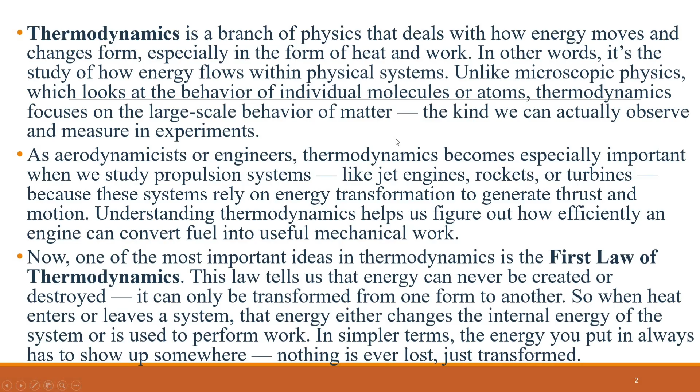Work. Let's pause for a moment and talk about what we really mean by work. In everyday life, we think of work as any physical effort, like lifting a box, pedaling a bike, or even running. But in science, we define work much more precisely. Work is the product of a force acting over a distance.

Imagine an aircraft that starts moving at time zero under the thrust force produced by its engines. As the engines continue to apply a constant force F, the aircraft accelerates and moves forward through a distance s. The total work done on the aircraft during this time is given by the formula: work equals force multiplied by distance. Here, the force is the thrust from the engines, and the distance is how far the aircraft travels from the starting moment, time equals 0, to some later time.

The standard unit of work in the metric system is the joule, which equals 1 Newton of force acting through 1 meter of distance. In the English system, the equivalent unit is the foot-pound.

Now, that's a nice simple example, but real life is rarely that neat. In most real situations, the force acting on an object doesn't stay constant. It can change in size and even direction. For example, as an airplane climbs, turns, or descends, the forces acting on it are constantly shifting. When that happens, the total work done is calculated by integrating, or summing up, the components of the force that act in the same direction as the object's motion. Only that part of the force that's aligned with the motion actually performs work.

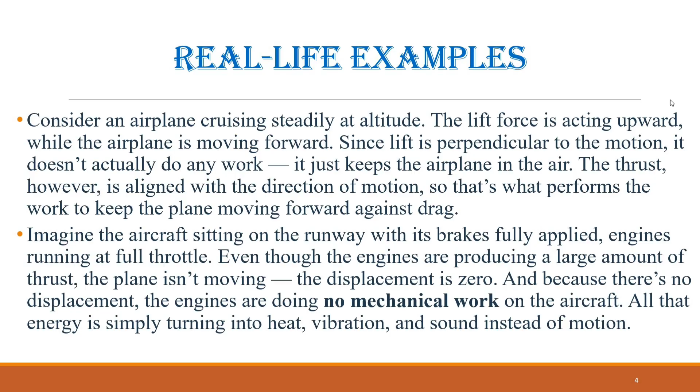Work done by a gas. So far, we've talked about work being done on solid objects. But in thermodynamics, we also deal with gases, and the concept of work looks a little different there.

For gases, work is done whenever the volume changes while under pressure. Think about it this way. Pressure represents a force per unit area, and volume changes when the boundaries of the gas move, like a piston sliding in a cylinder. If the gas expands, it pushes the piston outward, doing work on the surroundings. If it is compressed, work is done on the gas. This idea is not just theoretical, it's the principle behind engines and turbines all around us.

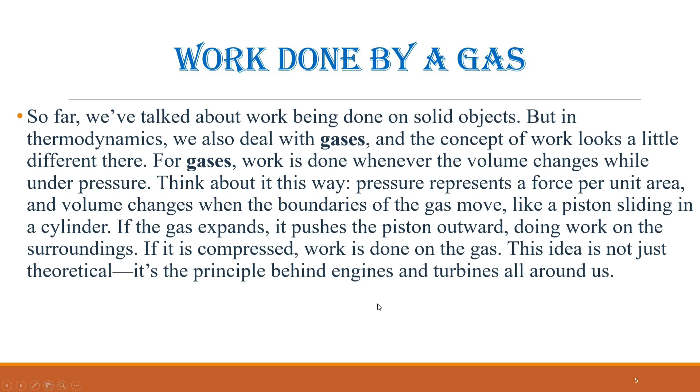The state of a gas is determined by measurable properties such as pressure, temperature, and the volume it occupies. These properties can change, resulting in a new state for the gas. For example, imagine a gas confined in a jar. In one state, the gas may have high pressure and occupy a small volume, which we call state 1. In another state, it may have lower pressure and a larger volume, known as state 2. We can represent these states visually on a graph of pressure versus volume.

To move the gas from state 1 to state 2, we can change the conditions in the jar by heating the gas, physically moving the piston to adjust the volume, or altering the pressure by adding or removing weights. Each method changes the state differently, and thermodynamics allows us to calculate how much work is done or how much heat is added or removed during these changes.

There are several ways to change the state of a gas, and the path taken matters. For instance, if we gradually remove weights from the piston, allowing the gas to expand and the pressure to decrease naturally according to Boyle's law, the path on the pressure-volume graph is curved. The work done by the gas in this process corresponds to the area under this curve.

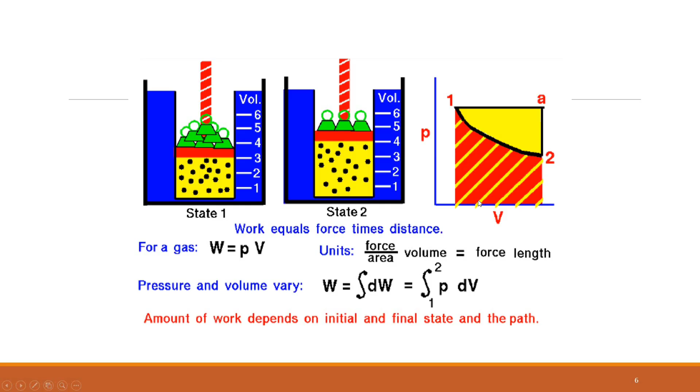We see these principles in action every day. Consider the cylinder of a car engine. When the air-fuel mixture burns, it produces hot gases that expand and push the piston downward. This expansion performs work which is transferred through the crankshaft to generate mechanical motion, ultimately moving the car. In a jet engine, high-pressure gases produced by combustion expand rapidly and rush out of the exhaust, doing work on turbine blades and producing the thrust that propels the aircraft forward.

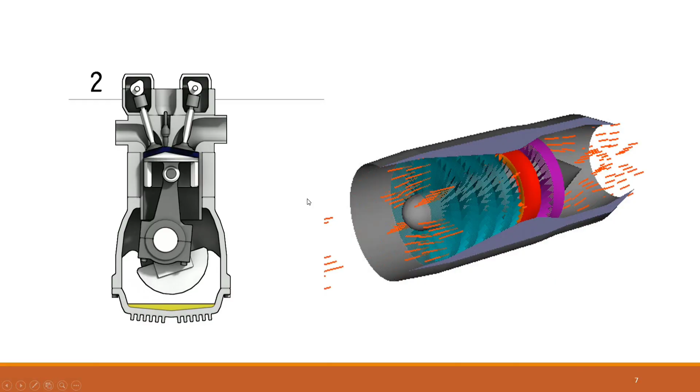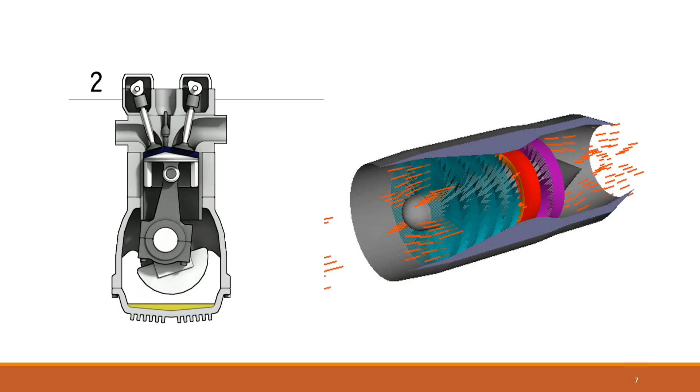Even something as simple as a refrigerator relies on thermodynamic work, as a gas is compressed and expanded in the cooling cycle to transfer heat away from the interior. As you can see, thermodynamics is not just an abstract or theoretical subject. It is the science that explains how energy powers the world around us, from the engine in your car, to the refrigerator in your kitchen, to the jet that carries you across the globe. Every time energy changes form, whether fuel turning into motion or heat being converted into work, thermodynamics is at play.

Enthalpy. As we know, the state of a gas is defined by several properties, including its temperature, pressure, and the volume it occupies. From our study of the first law of thermodynamics, we know that the internal energy of a gas is also a state variable. This means that internal energy depends only on the current state of the gas, not on the process that led the gas to that state.

In thermodynamics, we can also define additional state variables that are combinations of existing variables, and these often simplify the analysis of a system. One particularly useful variable for gases is enthalpy, denoted as H. Enthalpy is defined as the sum of the internal energy, E, plus the product of pressure P and volume V. Enthalpy is equal to the internal energy plus the product of pressure and volume.

Enthalpy can also be expressed as a specific or intensive variable by dividing it by the mass of the gas. In propulsion and engine analysis, engineers often work with specific enthalpy rather than total enthalpy because it is more convenient for calculations involving flow and energy per unit mass.

To understand the practical use of enthalpy, let's revisit the first law of thermodynamics for a gas. For a system experiencing heat transfer Q and doing work W, the change in internal energy is equal to the heat added to the system minus the work done by the system. The change in internal energy from state 1 to state 2 is equal to the heat added to the system minus the work done by the system.

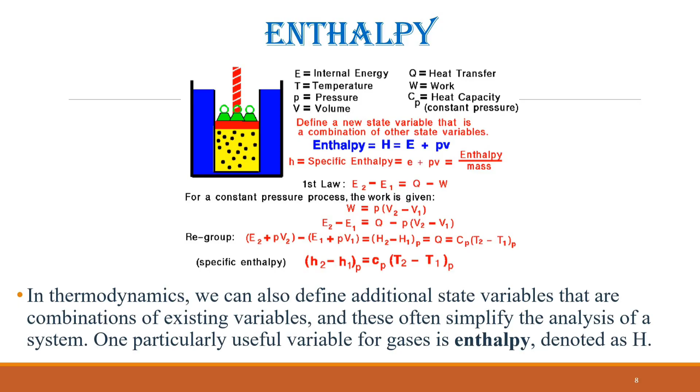Entropy of a gas. The first law of thermodynamics indicates that the total energy of a system is conserved. This includes the potential and kinetic energy, the work done by the system, and the transfer of heat through the system. The second law of thermodynamics states that, while many physical processes satisfy the first law, the only processes that naturally occur are those for which the entropy of the system either remains constant or increases.

Entropy, like temperature and pressure, can be explained on both a macro scale and a micro scale. Since thermodynamics deals primarily with the macro scale, here entropy is defined as the heat transfer into the system divided by the temperature.

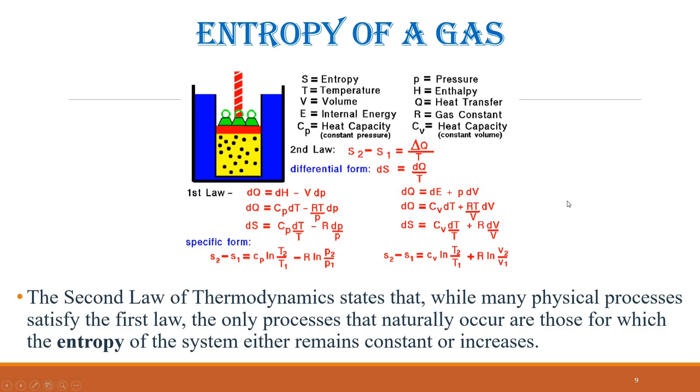Specific forms of equation 9 and equation 15 can be developed by dividing by the mass to obtain the specific heat capacities and specific volumes, which are commonly used in practical thermodynamics and propulsion analysis.

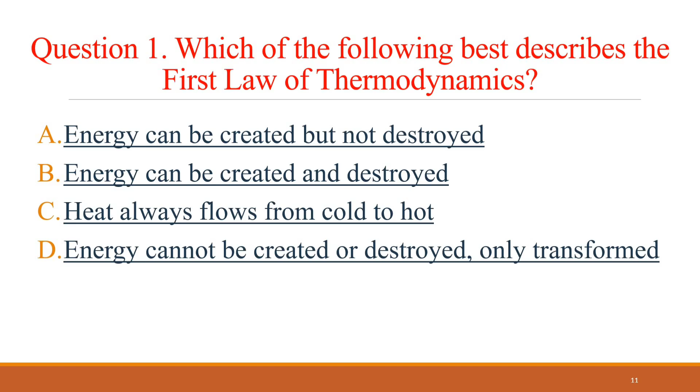Okay guys, now let's have a little quiz. The quiz consists of 5 questions. I'll give you 10 seconds for each one, and then I'll show you the correct answer. Let's start with the first question. Question 1. Which of the following best describes the first law of thermodynamics? The correct answer is energy cannot be created or destroyed, only transformed.

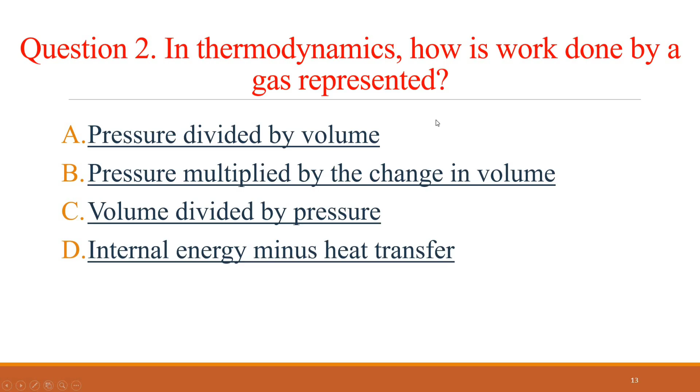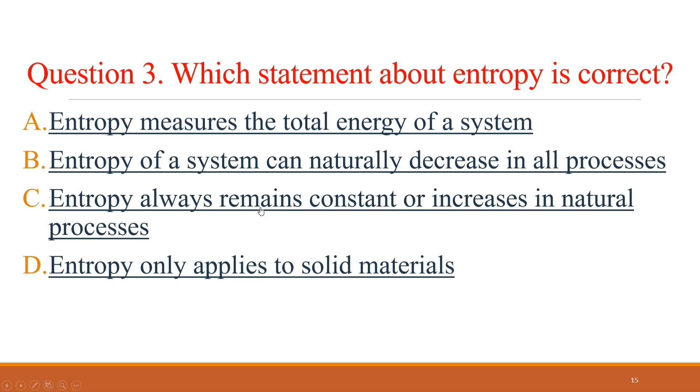Question 2. In thermodynamics, how is work done by a gas represented? The correct answer is pressure multiplied by the change in volume. Question 3. Which statement about entropy is correct? The correct answer is entropy always remains constant or increases in natural processes.